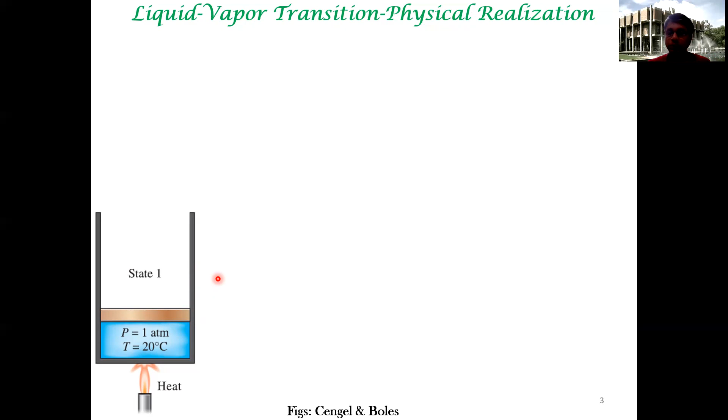So as you keep supplying heat, the temperature increases, the volume expands. Let's say we are thinking about water. So at 100 degrees centigrade, the water is ready to boil, right? So first here, there is no vapor. Okay, so the entire volume is only made up of water. The temperature of this column of water is increased from 20 degrees centigrade to 100 degrees centigrade. There's no vapor formed. At 100 degrees centigrade, this column of water is ready to form gas.

So what you've learned from your high school is that this column of water, when it hits 100 degrees centigrade, even though you are supplying heat, the temperature does not increase, right? That's where the latent heat comes in. So this heat supplied, you call it sensible heat, right? That is, the heat that is supplied goes towards increasing the temperature. Okay, it makes sense. So you don't call this nonsensical heat, but you call it latent heat. As it hits 100 degrees centigrade, even though you're supplying heat, there's no temperature rise.

So what does it do? The heat that is being supplied goes into converting liquid water into gaseous water. Okay, there's a phase change in water. There is a significant change in volume, right? So when you go from here to here, the volume change is marginal. There's not much change in volume. But when you go from here to this particular state, there's a significant change in volume, because the density of gas is much less than the density of the corresponding liquid.

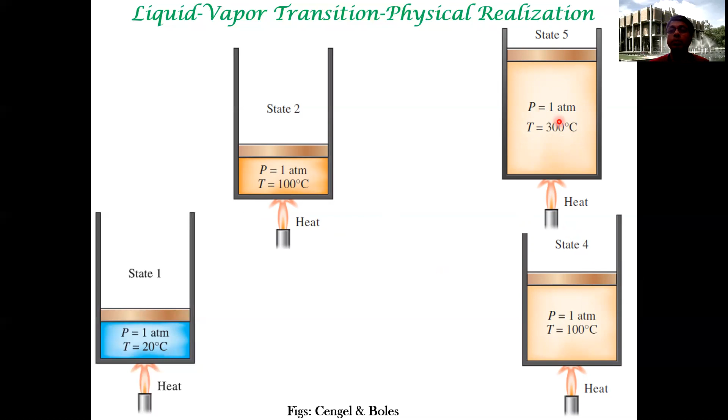Okay, so this is not a leaky container, so there's no gas escaping. This lid moves without any friction. So when you continue to supply heat, this would continue to expand, all right? So with the temperature increase again, that's again sensible heat. Only from here to here, where the temperature remains constant, you call it latent heat. But here again, there is sensible heat. So it would just amount to expanding this gas that has been formed. All right, so this is a physical process we are thinking about. This can be accomplished by experiments.

So how do you represent this in terms of a phase diagram? So what are we plotting here? We are plotting temperature. That needs no explanation. Along the x-axis, we are plotting specific volume, right? Volume per unit mass. So that's what we are plotting. That's indicated by this symbol, versus temperature.

This is called compressed liquid. This phase, right, from here to state 2, is called compressed liquid. What do you mean by that? What we mean is when you supply heat, this liquid continues to expand, but still there's no phase change. It is just the liquid. Okay, so this region of the phase diagram is called compressed liquid. This point you call saturated liquid, a liquid that is just about to boil.

Okay, so any small amount of heat that you supply, it will form gas. Okay, that point is called saturated liquid. We will come to saturated mixture later. So this point 4 is called

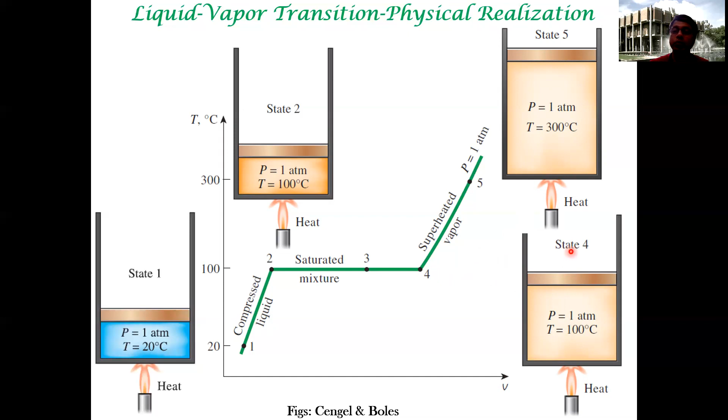saturated vapor. So when this system is in state 4, any heat that is removed will give rise to a liquid. Again, it will give rise to phase change. That point is called saturated vapor. When you go from 4 to 5, you call that superheated vapor.

Okay, these are some terminologies. Many things have come due to certain historical reasons and so on, but you should just be aware of these terminologies. All right, so it is important to note the entire process we are considering occurs at 1 atmosphere. There's no change in pressure at all. So it's important.

This is an equilibrium system in the sense that at each point the system is in equilibrium. There's no motion. So these are all what you call quasi-static changes. So even when this vapor expands, when there is a movement of the lid of the piston, that occurs very slowly, such that the equilibrium is maintained. There are no dissipative forces, there's no friction, the pressure in the entire system remains the same.

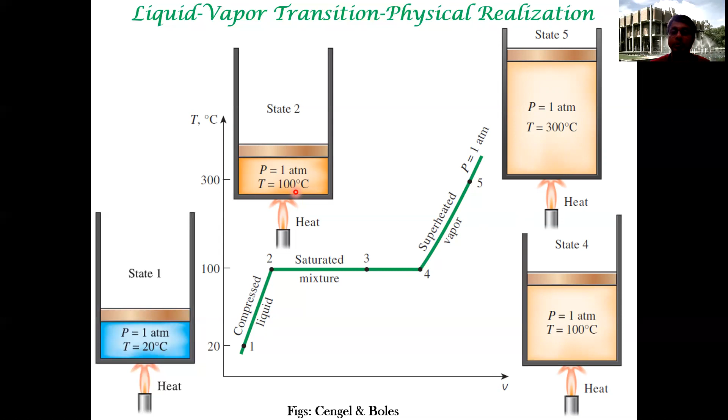When there's a pressure difference, there can be flow and so on, which can give rise to viscous dissipation and so on. Nothing like this exists. So this is again an idealization of a process, quasi-static processes. So the entire system is in equilibrium. That's the process we are talking about. Even when there's a transformation, we are talking about a quasi-static transformation.

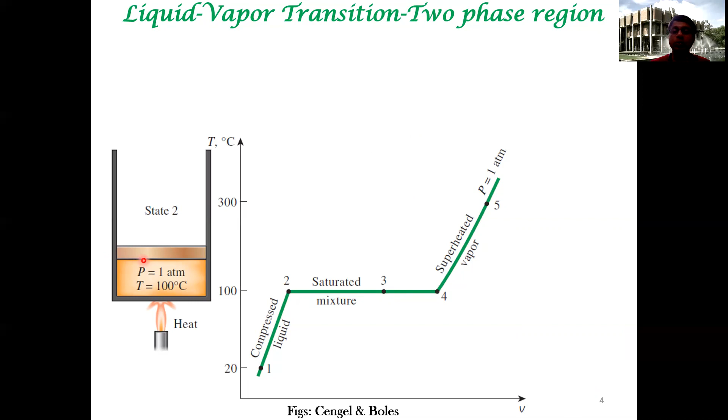All right. So the thing which we didn't look at in the previous slide is the saturated mixture. So let's take a point, state 3. What is a saturated mixture? When we go from state 2 to state 4, more and more liquid goes into the gas phase. So state 3 is this state, which has a two-phase system. There is a liquid phase as well as a vapor phase.

These are a particular kind of liquid. It's not a compressed liquid, but a saturated liquid. What do you mean by that? As I give some more heat to the system, there's a phase change from the liquid to the vapor. What do you mean by saturated vapor? In this case I talked about supplying heat. In saturated vapor, when I remove heat, there's a phase change: there is a condensation of vapor to a liquid.

Okay, so this entire two-phase system is comprised of saturated liquid and saturated vapor, right? So this is 50-50 by volume. There's half saturated liquid and saturated vapor. As I go from 2 to 4, the extent of vapor keeps on increasing. Here there is no saturated vapor. Here, there's no saturated liquid.

Okay, so this is the two-phase system. However, here there is a single phase. Here also there is a single phase. So this is one of the simplest phase diagrams you can visualize for a pure system.

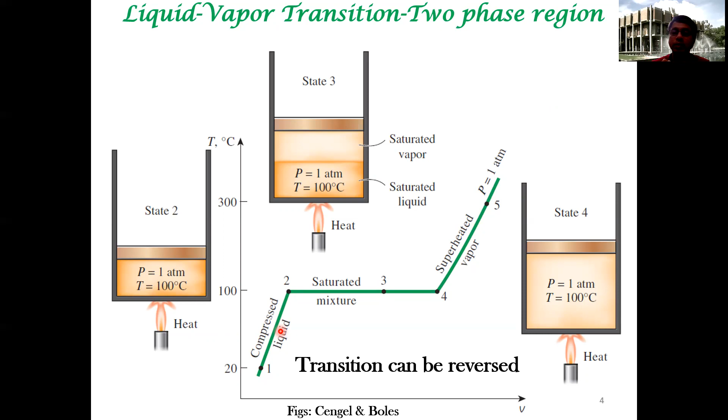These are the features of an ideal process called the quasi-static process. Quasi means what? Almost static. Any transformation that occurs is an infinitesimal change from one state to another. All right. So these terminologies are quirky. Sometimes they defy logic.

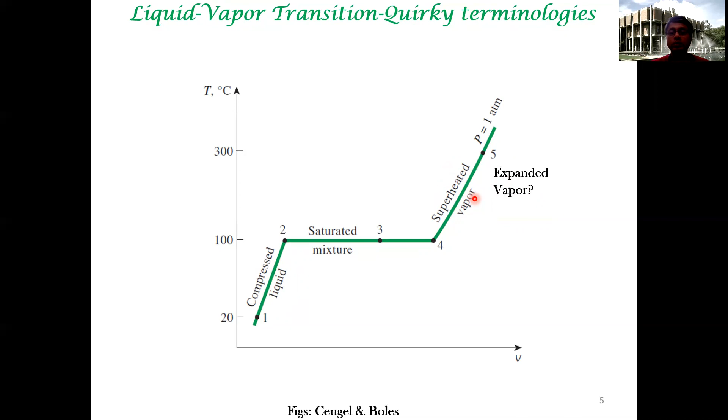I'll tell you why. If you are calling this compressed liquid, I would have thought that this would have been called an expanded vapor, or expanded gas. It's not so. You call this superheated vapor. Why, we don't know. But that's the terminology, superheated vapor. If you call this superheated vapor, you should be calling this supercool liquid, right?

Supercool liquid is not a liquid that is cool. That's not what we're talking about. Supercool liquid has nothing to do with the liquid-vapor transition. When you freeze a liquid, when you convert liquid water to ice, there is a phase transition that involves nucleation and growth. If you suppress it, you can have liquid water even below 0 degrees centigrade. You can go to minus 20 degrees centigrade and still not have ice.

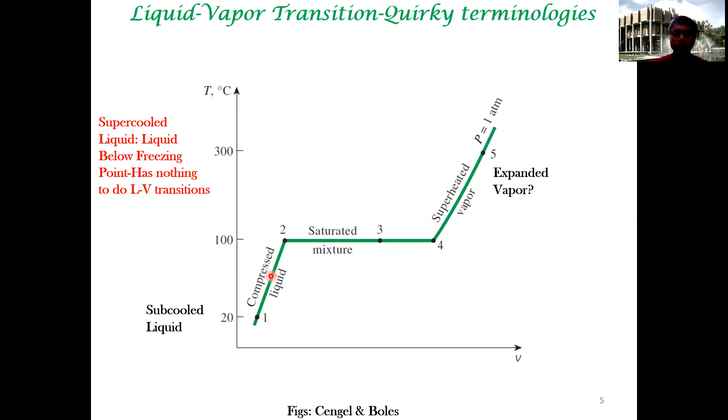We mentioned that a liquid boils when the vapor pressure becomes equal to the superincumbent pressure. So what if the superincumbent pressure changes? Let's say you increase your elevation: in summer you go from mean sea level to a hill station and try to boil water. As you increase the elevation, the pressure decreases. The extent of the atmospheric column decreases, so the atmospheric pressure also decreases. So how does the boiling point change with pressure? You would think the boiling point will decrease.

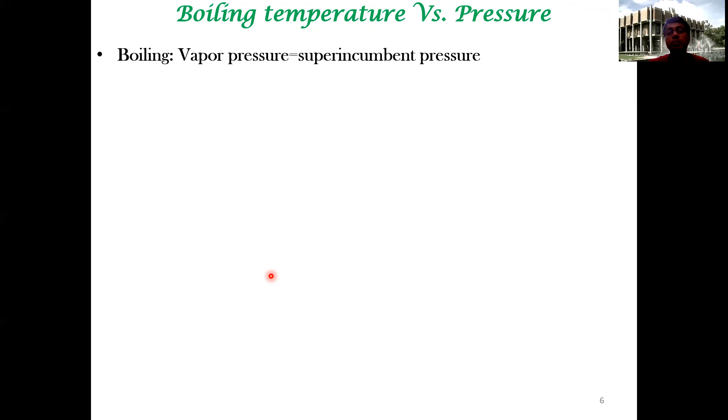You can also consider the other case: if you increase the superincumbent pressure, how does the boiling point change? The boiling point would tend to increase. In the previous case, the boiling point might decrease. You can also have cases where the boiling point increases. So this is what we are trying to say: when the pressure, called the saturation pressure, increases, the saturation temperature will also tend to increase.

When we say 100 degrees centigrade, this is approximately atmospheric pressure. This is all in kilopascal. Let's say atmospheric pressure is 101 kilopascal. So this is 100 degrees centigrade, your normal boiling point at 1 atmospheric pressure. But as you keep increasing the pressure, your saturation temperature, the boiling point, will increase. When you decrease the pressure, the boiling point does decrease. These have been documented in your textbook.

So you can change the boiling point significantly. At 1 atmospheric pressure it's 100 degrees centigrade. As you keep increasing the pressure, your boiling point changes, and you can also decrease it. These are very important for certain applications. There is an application called freeze drying. You want to remove water vapor from, let's say, some food.

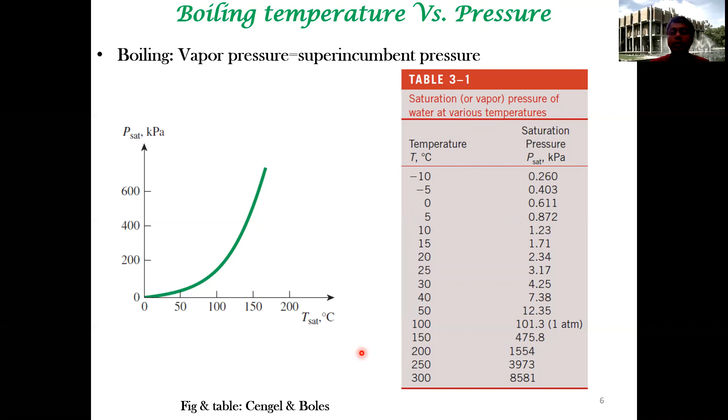You don't want to cool the material to a very low temperature. One way to remove water from such material is to evaporate it at lower pressure. This is called freeze drying and so on. These applications are mentioned in your book, so you can go through them. You should be aware of this. Okay, so let's go to another topic. We are going to correlate a property with structure.

Okay, we had introduced these notions of structure in the previous lecture. So what is it that we want to rationalize? We want to rationalize here latent heat, latent heat of vaporization. So when we said that we moved from state 2 to state 4 in the previous slides, what is happening? More and more structure is getting transformed from the liquid to the vapor phase, right?

So what is happening? That's what you mean by latent heat; in this particular process it is called latent heat of vaporization. So in this state, when you supplied sensible heat, the heat that was supplied went into thermal motions. Things were vibrating faster and faster, right? So if you count the number of bonds, more or less the number of bonds has not changed.

Supposing you melted from the solid to liquid, that phase transition has occurred, but in state 1 you're already liquid. As you go to state 2, if there's a notion of number of chemical bonds, approximately we say the number of chemical bonds doesn't change. What is changing? Just the kinetic energy available in each degree of freedom, all right?

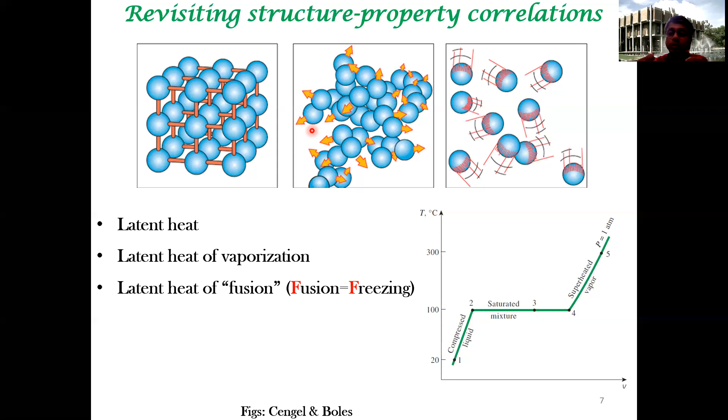Look at the environment around you. Look at the power required for running an air conditioner. A 100-watt bulb. You know all these things, right? So you should have a feel for these numbers. When you say kg, what is a real kg? When you lift an object, you should have some feel for all these numbers. So let's look at this particular thing.